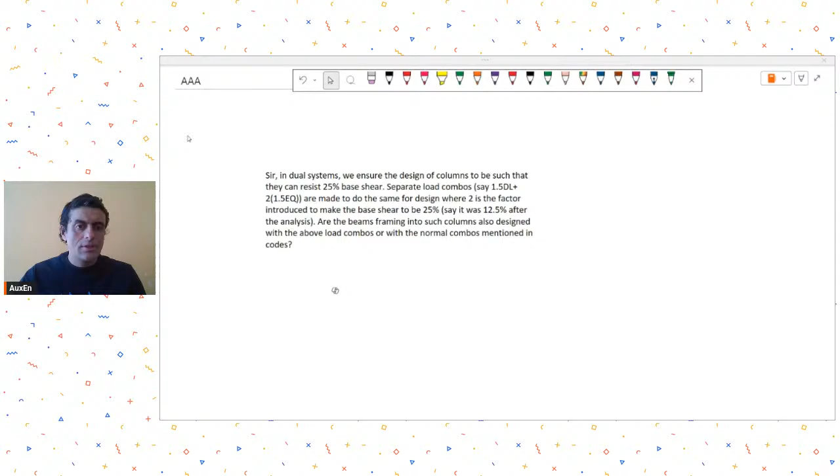The first question for this week has been asked by Engineer Manish Kumar Pandey. He's from Ranchi and he's a working professional. In the same context, another question has been asked by Engineer Kirti Gupta. She is from Noida and she is a working professional. I'll take both questions together because they are of similar nature.

The first question being asked is: in dual system clause, the base shear must be distributed 25% to columns and 75% to walls. If it is not fulfilling, how to take care of this clause?

What do you mean by not fulfilling? Have you found out how much percentage your walls are taking and how much percentage your columns are taking? It's not only base shear, it's the effects of EQ loads. So you need to first find that out.

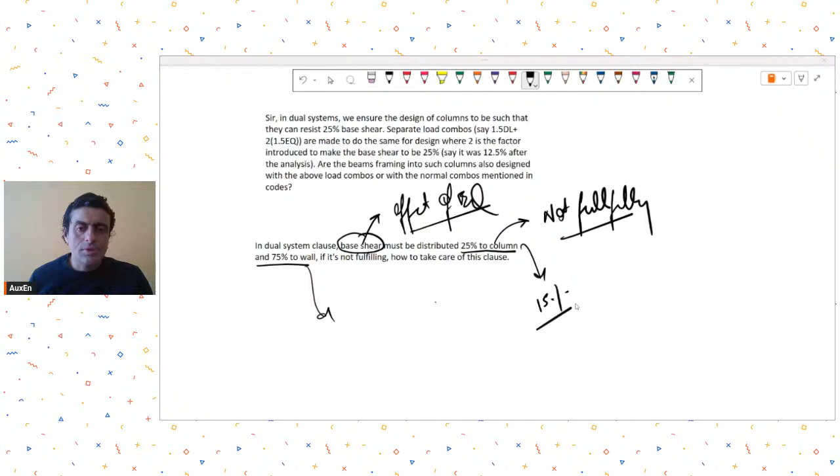Let's say your columns are taking lesser, maybe 15% of base shear. Then you need to increase the column sizes, make them stiffer so they start resisting greater shears. Or look at reducing the wall sizes, maybe they're too much, more than required. Also check the frame you've created, the lateral system, the beam system joining your columns to other elements. See whether modifications, like slightly increasing their sizes, will transfer some base shear to columns. Try these things and check whether it increases the percentage distributed to your columns.

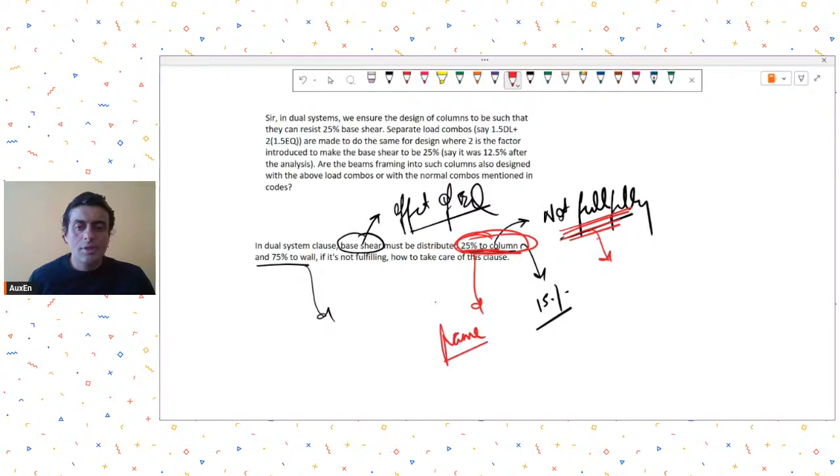So first, try to make your columns stiffer, larger columns, maybe add more columns. Second, try to reduce the size of your walls slightly from what was provided. Third, modify your beam system so more forces flow to the columns. Try these things and see what happens.

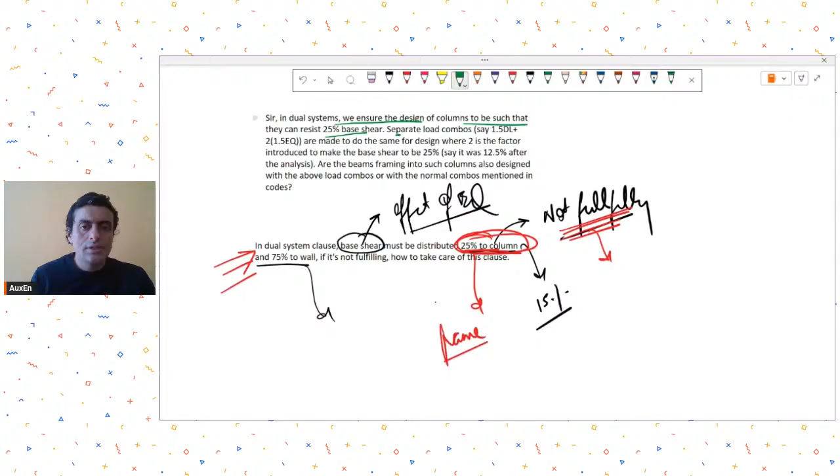In the same context, the next question was: in dual systems, we ensure the design of columns to be such that they resist 25% of base shear using separate load combinations. So you've made a jugaad type of load combination just to ensure that 25% of base shear is getting transferred to the columns, where 2 is the factor introduced to make the base shear.

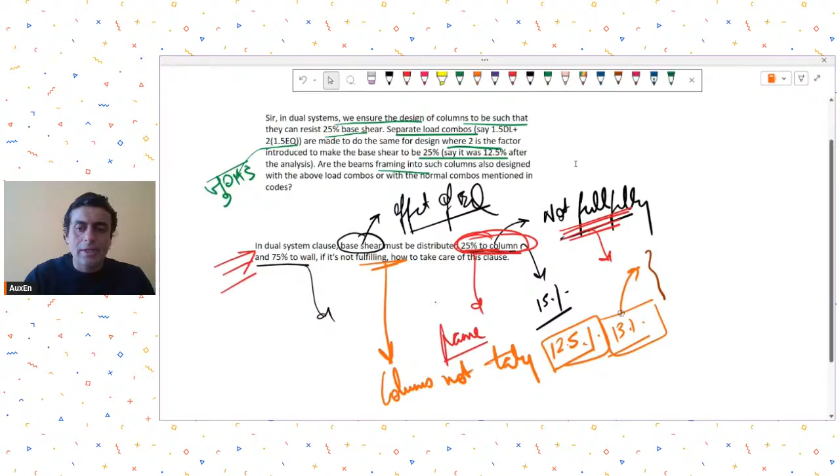To answer Kirti's question, one more point I'd like to add. Suppose your columns are not taking, they're only getting, as Mr. Manish says, 12.5 or 13% of the base shear, and you want to artificially increase them to ensure this 25% clause is met. My first reply was more about behavioral aspects, but here, if your columns are taking a lesser percentage than the designated 25%, here's another approach: let's say you applied EQ loads and for EQ loads they are taking 13% of your total base shear.

Now, with a small jugaad - for example, this was for your load combination 1.5 DL plus 1.5 EQ, and for this particular load combination it was taking 13%. Since you just wanted to ensure the codal clause, and you wanted 25% to be taken but it's taking 13%, take this ratio - let's say it comes to around 2 point something.

Okay, it will come to, let's say, 1.9 something. So now what you do is make a load combination, and you multiply the load combination factor artificially by this ratio. So now you have created a combination which you will use to ensure columns are designed for higher base shears. In this manner, practically you can try to satisfy the 25% limit.

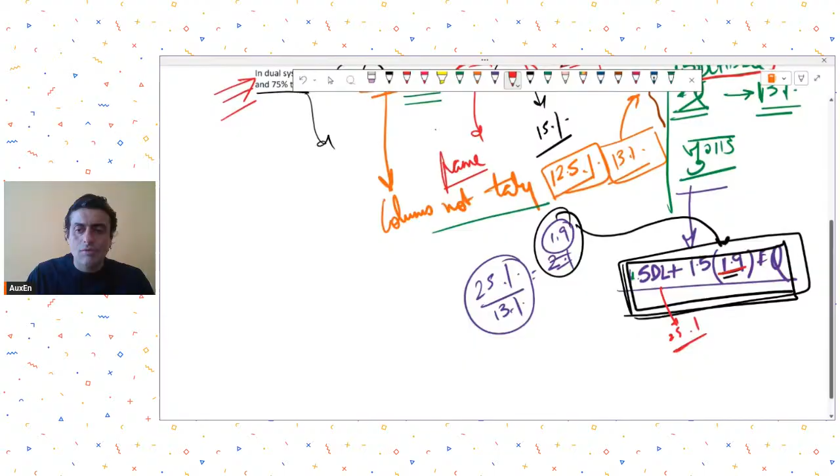But practically, if you just want to fulfill this 25% clause, you do it this way: whatever load combination you have made, you artificially multiply it by this multiplication factor, and then you see how much base shear is being taken by the columns. So for this load combination, you only design your columns, nothing else.

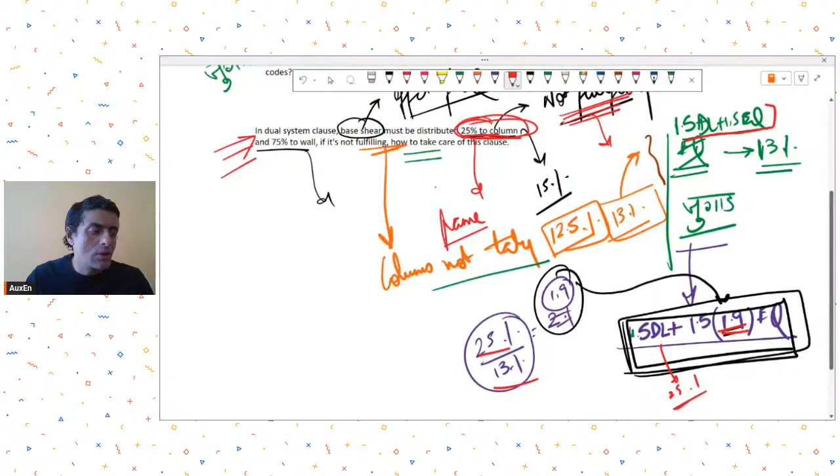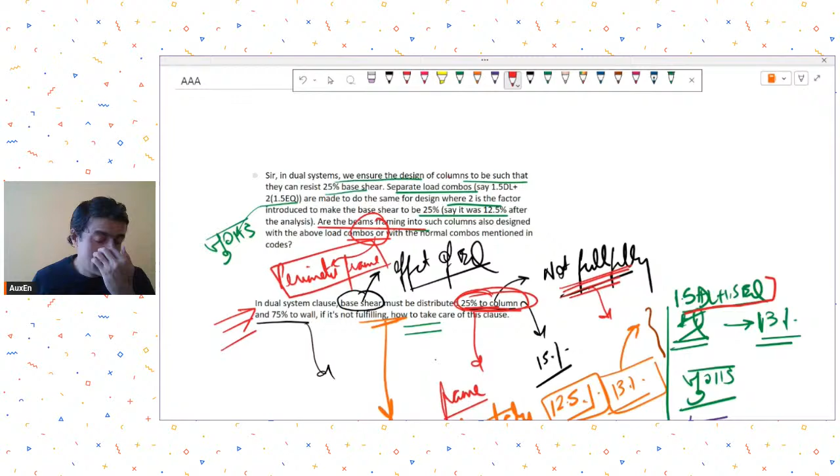Mr. Manish is asking, are the beams framing into such columns also to be designed with the above load combinations? Yeah, the code uses the term perimeter frame, so that includes the columns plus the beams. The part of your perimeter frame will include both beams and columns. So the entire perimeter frame should be designed for these artificially magnified load combinations.

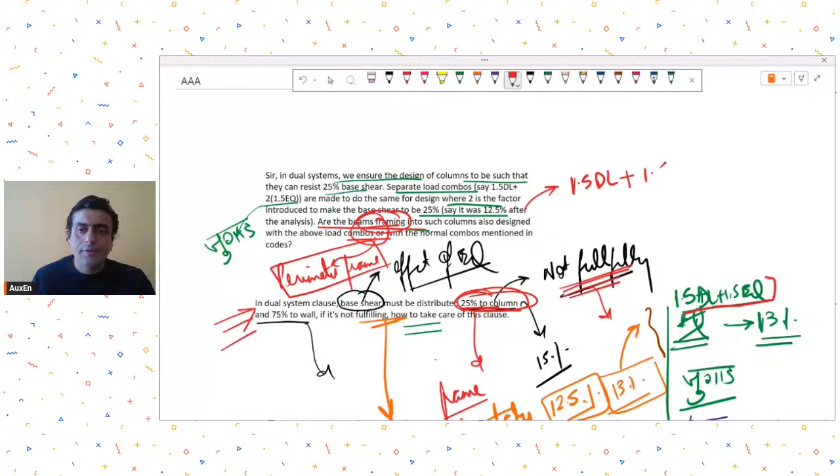Is this clear? So, for example, in your case, you had made this combination. You use this combination for designing your columns as well as the perimeter beams. So this was both the queries related to a similar topic.

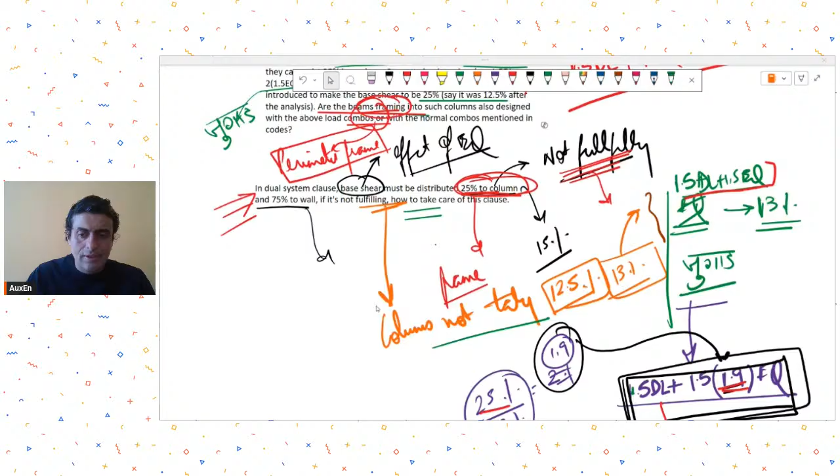Now we have a query from engineer Akash Babar. He is a working professional from Sangli, and he is asking, what are the design guidelines for grating and checkered plates?

I'm not aware of design guidelines, but basically you have to design them so that they are able to take the required loads. I'm sure there might be a specific IS code for it, however, I'm not aware of any such code right now.

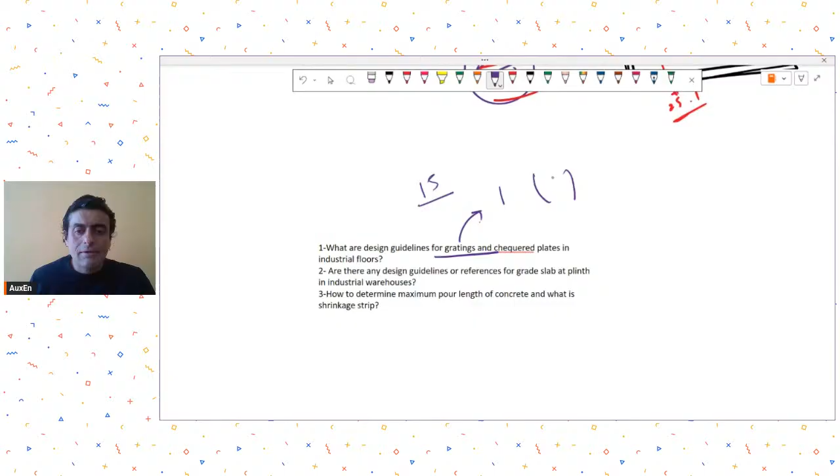Design-wise, whatever load you need to take on your checkered plate or grating, you design it as per the supports you have provided. Generally we treat checkered plates as two-way spanning slabs, so you may take the similar moment coefficients given in IS 456 for two-way slabs, and from there, on the basis of load to be resisted, you can find out the checkered plate thickness.

For grating, generally it's sort of a grid beam, because there are grids, there are flats provided like this, bidirectional flats, and for gratings generally you get from the manufacturer side a load sheet. By load sheet I mean they will tell you that for what span of your grating. Grating will generally be two-way spanning.

You can have checkered plate one-way spanning, but gratings usually are provided as two-way spanning, meaning you need support in both directions, all four sides. So for gratings, generally you may get load data sheets provided by the supplier or manufacturer, which tell you that for this span of grating, this is how much live load it can resist. So you may refer to those guidelines and load sheets given by the manufacturer.

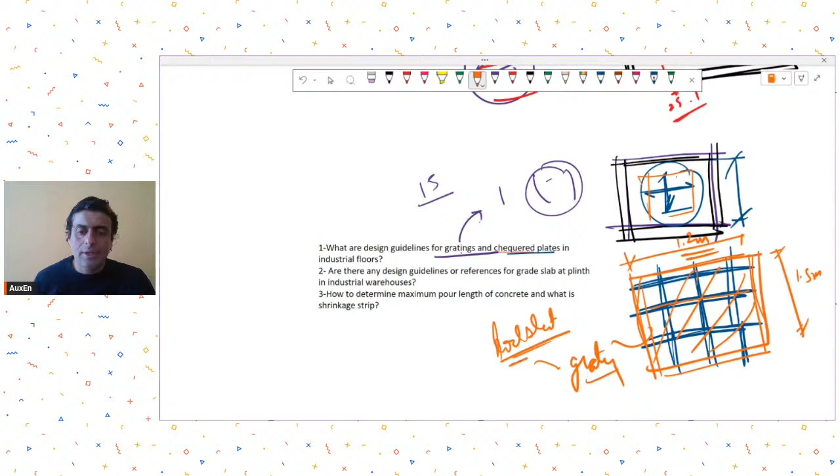Or if you want to do it on your own, you can make a quick model where you create these types of line elements, give them the size of the flat, and have all edges restrained on all four sides, and then see the moments you're getting in these individual flats, and find out the size requirement for the flats.

But are there any other specifications as per IS code? I am not sure, there might be some, but I also need to study. I don't know.

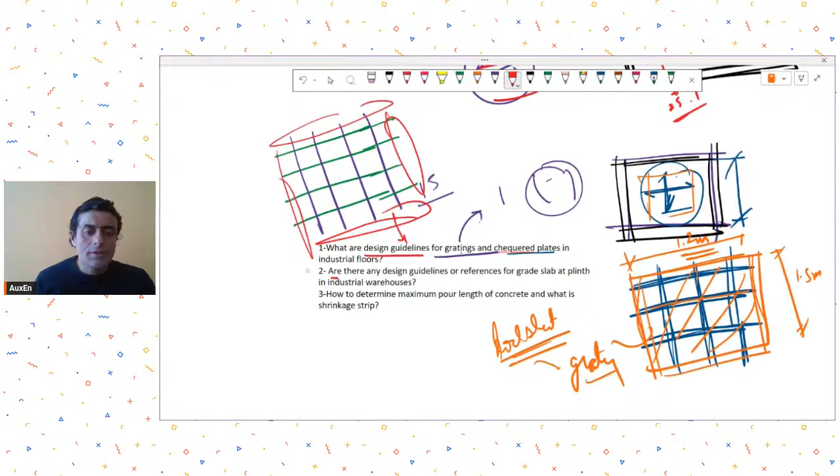His second question is, are there any design guidelines or references for grade slabs at plinths in industrial warehouses? Yeah, there are a couple of good guidelines available. One is a British document, and that British document is TR 34. One is this TR 34 document for industrial floors.

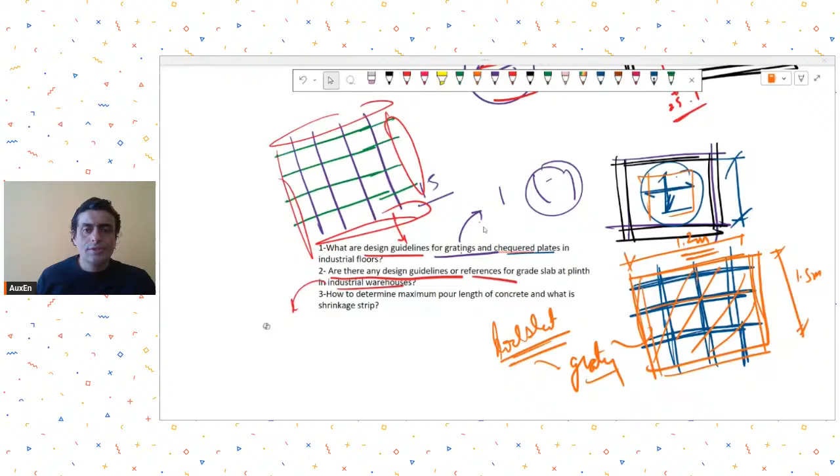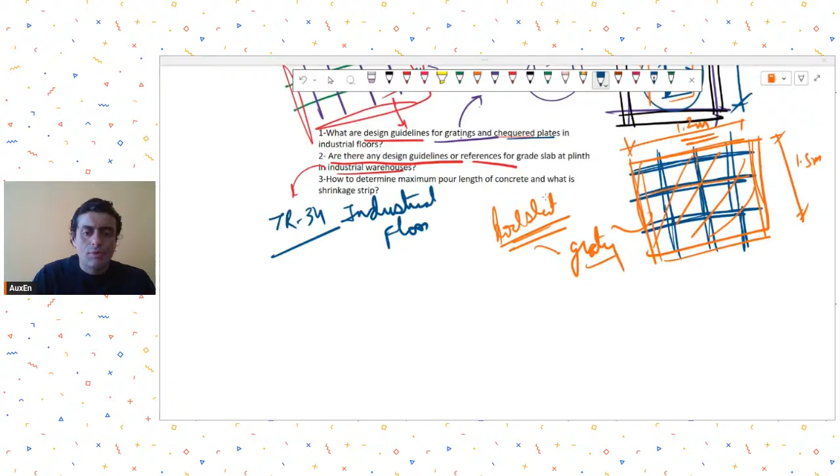It's a British document which you can refer, and it's quite detailed. TR stands for Technical Report number 34. This is a good document if you want to find more about industrial flooring and its design.

Then you also have another document, ACI 360. This is the American code, ACI 360 - not AISC, it's American Concrete Institute 360. This is another document for understanding the guidelines for industrial floors.

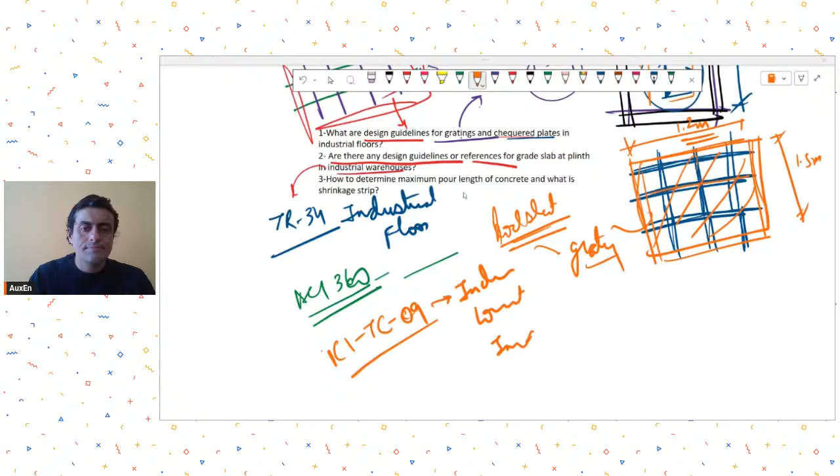You also have an Indian document published by the Indian Concrete Institute, called TC09. This takes most of the things from TR 34, and is also a good document if you want to study more about industrial floorings. The calculations are similar to what we do for rigid pavements based on Westergaard's equation, so those types of calculations remain the same. You might be interested in going through these documents.

Then the third part of his question was how to determine the maximum pour length of concrete and what is shrinkage strip. Shrinkage strip is basically when you want to leave a portion - so this is, let's say, casting concrete, and this is also concrete. This is showing you the plan view.

Suppose instead of doing a continuous casting, maybe to release the temperature effects or shrinkage effects, or because there were two dissimilar structural systems which you wanted to isolate from each other, separate from each other - suppose you wanted to do that, then we leave this part uncast, and cast it later. Such a strip or panel, such a portion which you are not casting together and are separately leaving empty to be cast later on, such an element is called a shrinkage strip.

Generally you see this in rafts, basements, where you have a podium area and a tower area, and you wanted to separate the podium area from the tower area - then we generally leave these shrinkage strips, which we cast later on.

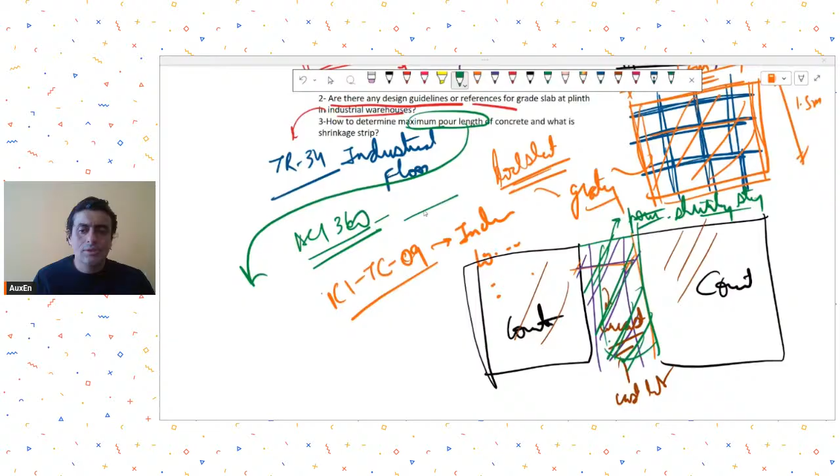How to determine the maximum pour length? Maximum pour length will depend on your capability, how much concrete you are able to cast in a single operation. Second, it will depend on the temperature effects, if applicable - beyond how much length temperature effects will become critical. So temperature effects or your ability to cast concrete in one single operation, or maximum pour length will also depend on the structural configuration.

As I just said, maybe if you wanted to separate the tower area from the podium area, you decide to only cast till this length and then leave a pour shrinkage strip, because there was a podium area which you did not want to cast. So that may also determine the pour length. Based on these aspects you may decide your pour length, and this is what is shrinkage strip.

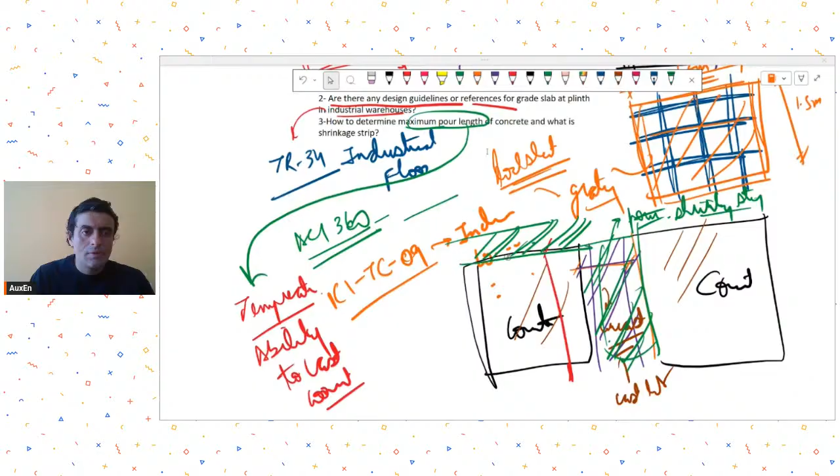So these were the queries by engineer Akash, and then we move on to engineer Shaktivel from Chennai. He is a working professional, and he is asking...

I am actually facing difficulty in connection design and how to interpret the STAAD results.

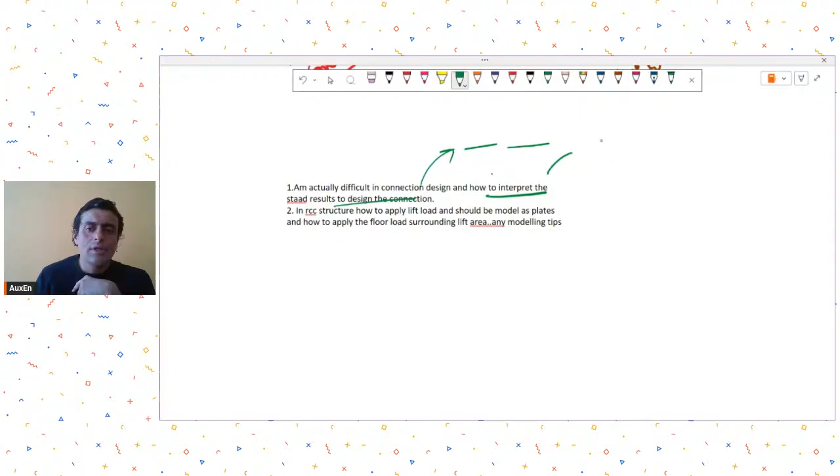What is the difficulty you are facing? You have to be more specific with your query. STAAD will give you the member end results, and then you note down these member results and use them for your connection design. So you have to be more specific with your query about what difficulty you are facing.

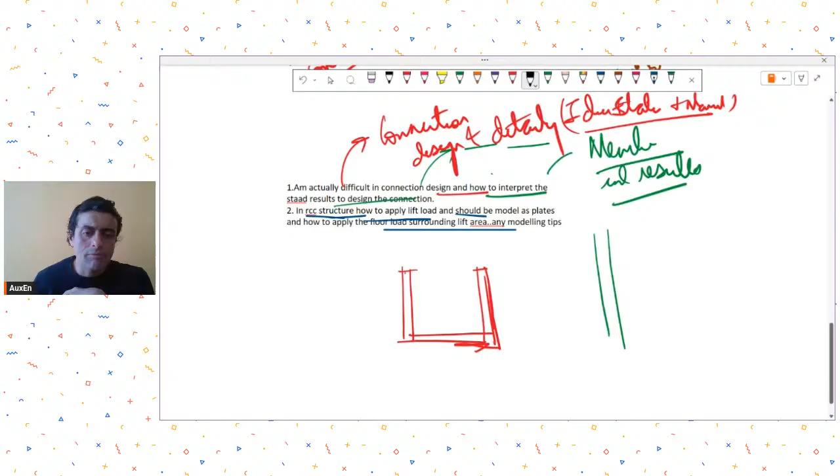Lift load generally is very negligible if you see. The major lift load is, so if this is the plan view of your RCC wall, let's say you have provided an RCC wall all around, your lift load generally is going to rest on the wall.

So what happens is they will have this type of arrangement in elevation. This is their lift, and then they will have a top slab. If it's a machine room lift, then there is a machine room above it. This machine room load is to be considered on this top slab wherever you place your machine room, and generally your lift goes till this level, the topmost floor level where the lift goes. Above that there will be a machine room.

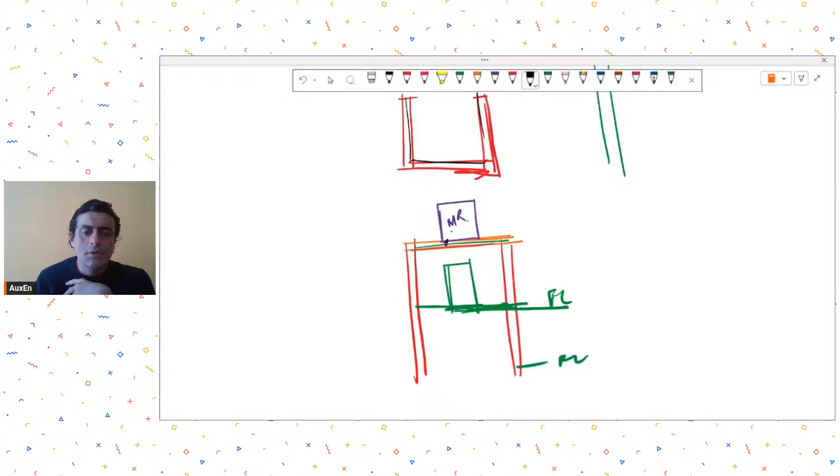Now that machine room will have some motor, so that motor load has to be considered, and it has a pulley system which helps your lift go up and come down. So you will have to consider the loads of this pulley. Those loads are generally given by the equipment supplier, so you have to account for this.

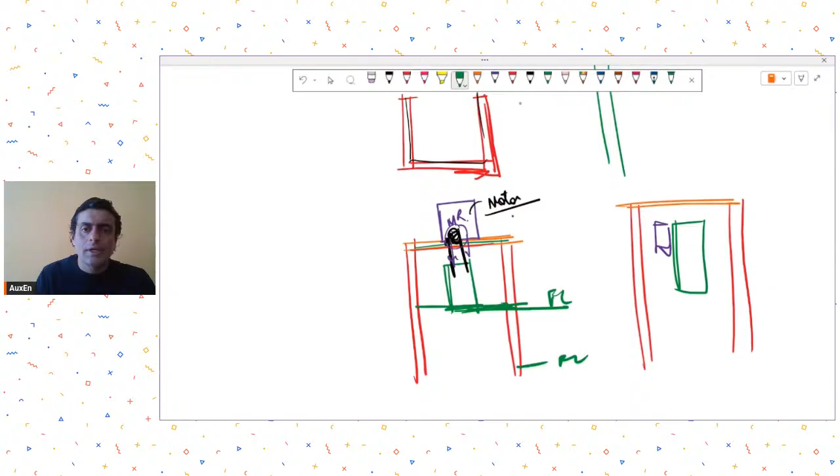In machine room-less lifts that you get these days, you will not have a separate machine room, but the motor is connected to the lift itself. So you will have your lift, and it has a motor connected to it, and then there is a pulley which does the lifting. In such cases, you just need to apply the load given for this pulley by the equipment supplier. So here you may provide some beam, and apply those loads on this particular beam.

Lift loads are not much. Even if you see a 1000 kg lift, that means only a 10 kilonewton load. A 1000 kg live load, say for 8 or 12 people, even if you consider 2 times impact load, that is only 2000 kg. If you add another 1000 kg for equipment, even though it's not that heavy, we are looking at 3000 kg, which is only 30 kilonewton, which is nothing. So lift loads are very nominal compared with the overall structural capacities that your elements have.

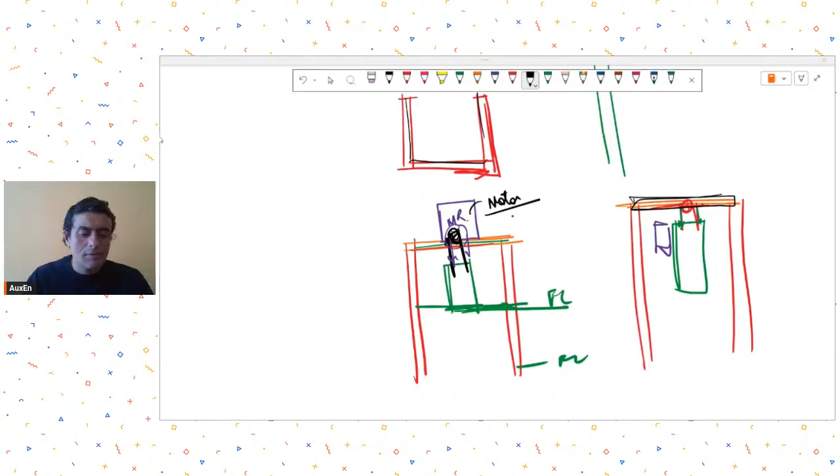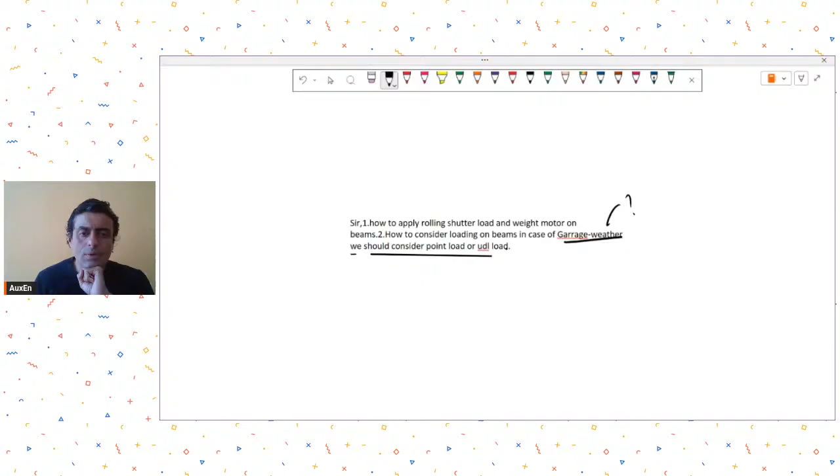He is asking how to apply rolling shutter load and weight motor on beams, how to consider loading on beams in case of garage weather. I don't know what garage weather means. We should consider point load or UDL load, and how to apply rolling shutter load.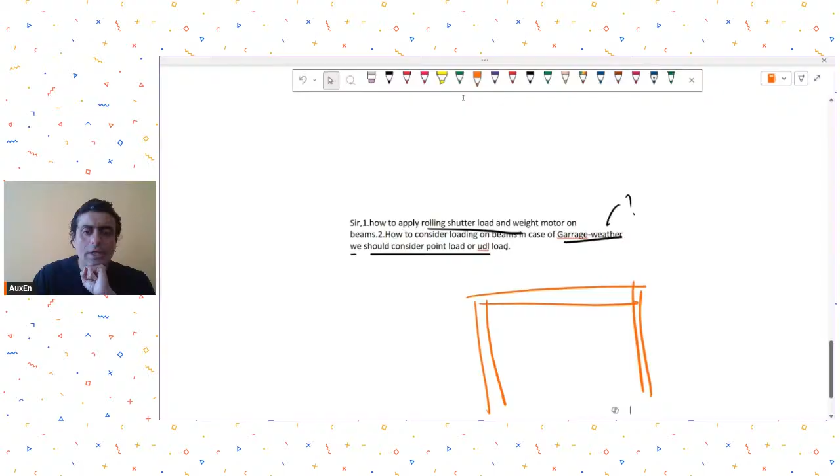Generally wherever you provide a rolling shutter, there is a frame that you provide, and from that frame there will be some motor element, and from that motor your rolling shutter operates. So generally that rolling shutter has rails fixed to this frame, but the motor is suspended usually from the top beam. You may have two motors, or you may have one central motor, whatever the design is.

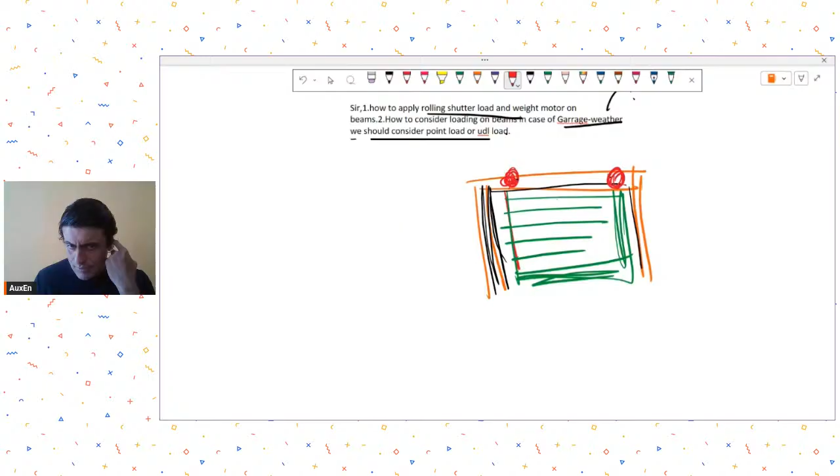Again, you need to ask your rolling shutter supplier what the loads are, and then apply those loads as point loads on these beams. The rolling shutter load is not much, so it's a very small amount of load compared with the overall structural capacities that your elements have.

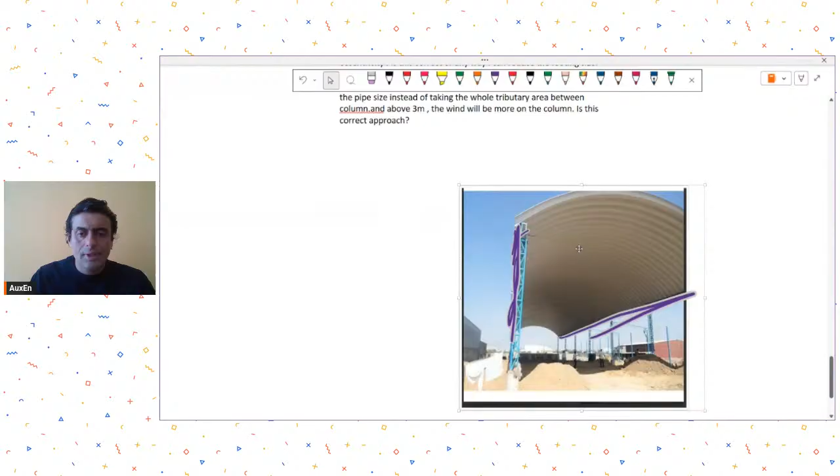So this is the image he shared last week, and in continuation to this is a follow-up he is putting. He is asking about the load application on a steel beam, for his Proflex sheet, a self-supporting roof resting on a steel beam. Instead of applying all the loads laterally, won't it be more appropriate to resolve the forces into two components?

Yes, of course you have to apply it as two components. Your Proflex sheet supplier will give you two reactions: one gravity direction component, and one lateral component. So you have to apply both, obviously.

Then his next query is also due to this lateral load on the column edge. Huge moment is getting generated at the steel and concrete column junction, resulting in more thickness of base plate. He has shared an Idea Statica image, let me check the email.

I'll just check the email if he has shared it on the email.

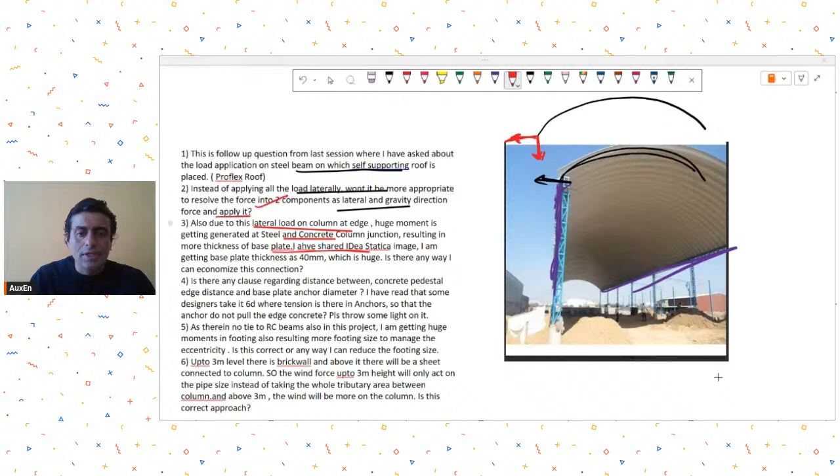So many people have this misconception that Proflex sheeting is cost efficient, but it's not. It does not come out to be cost efficient, because you may save on your rafter system, since the Proflex sheet itself is a self-supporting structure that takes the loads. But whatever you save in Proflex sheet, you put a lot of extra material into your columns, beams, and footings. So finally, if you see, it's not a saving that you get.

So this is his hollow section, and this is the connection that he has designed. He is saying that in this connection he is getting a base plate thickness of 40 mm, which is huge. Is there any way I can economize this connection?

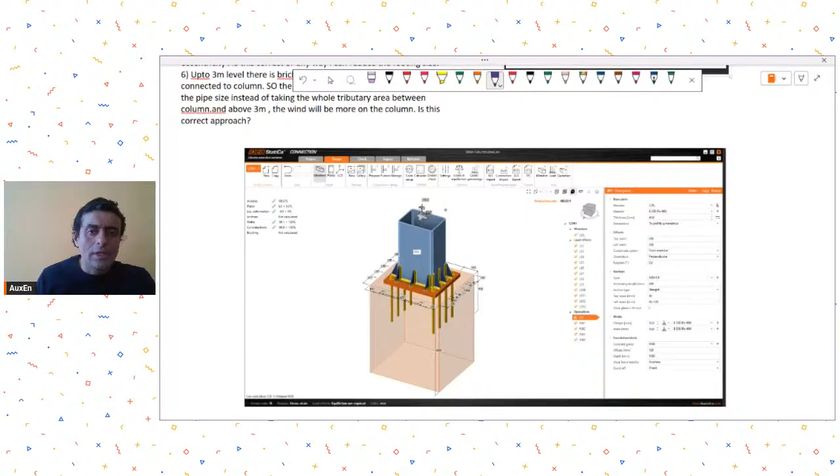Instead of putting it like this, what you do is provide gussets. So if I were to show you the plan view, let's say this is your column in green, a steel column, shown in hollow section, and brown is the base plate. My suggestion for a better structural system is that you introduce gussets like this, and then also gussets like this. Continue them like this with small pieces, and then also make stiffeners.

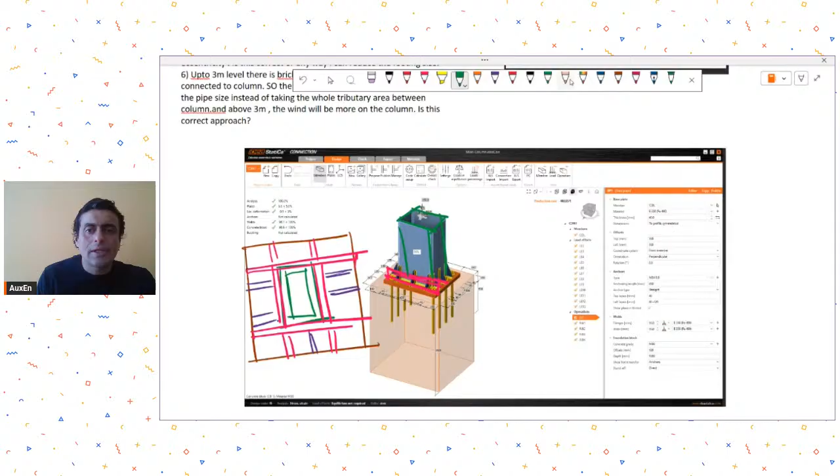Are you with me, Zoba? What I'm saying is you do this and then give a bolting arrangement like this. This will result in a much stiffer connection, and this will help you reduce the base plate thickness also. So instead of the connection type that you have given, try out a connection like this. In my opinion, it will be a better connection than what you have provided.

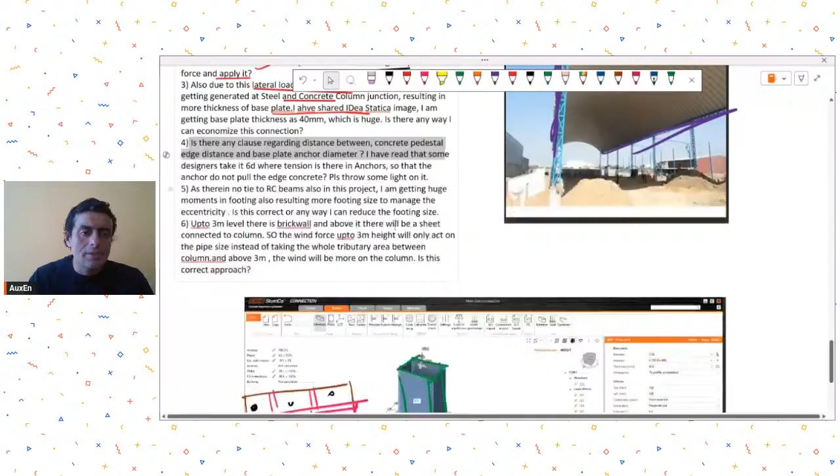Then his next query was: is there any clause regarding the distance between the concrete pedestal edge distance and base plate anchor diameter? I have read that some designers take it as 6D where tension is there in the anchors, so that the anchor does not pull out. Please throw some light on it.

You may try to refer to chapter 17 of ACI 318. They have given a detailed chapter on the anchors which connect your steel elements to concrete, and you will get a lot of good detailing rules that you can follow to avoid shear failures or bursting failures associated with these anchors. So read chapter 17 of ACI 318-25.

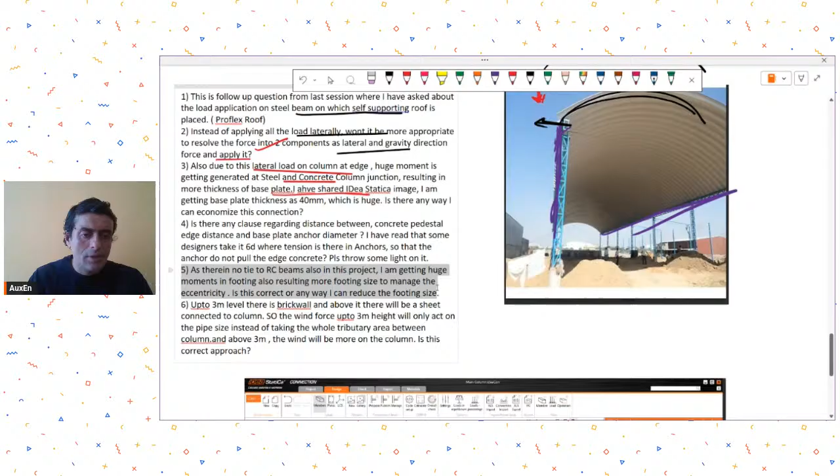His next query is: as there is no RCC beam, I am getting huge moments in the footing, also resulting in a larger footing size to manage the eccentricity. Is this correct, or is there any other way I can reduce the footing size? No, there's no other way.

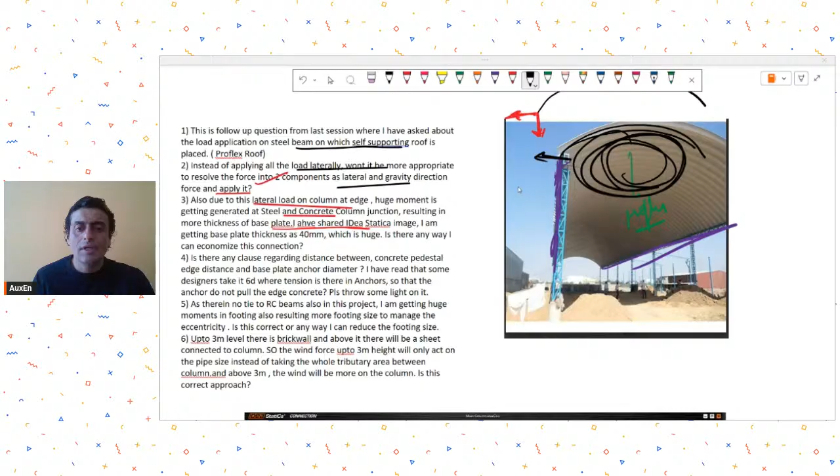As I told you, people have this misconception that Proflex sheeting is cheaper. It's not. This system will be almost as expensive as a truss system or a rafter system. Whatever you save, because the Proflex sheet suppliers will tell the client, see, you are saving on truss, you are saving on rafter, etc., but then a lot of money goes into designing these columns for huge moments, and you put a lot of money into footings which will be very large because of the large moments. So there is no easy solution - you'll get large sizes for your column and large sizes for your footing, because of the very configuration that you have provided. So no easy way out.

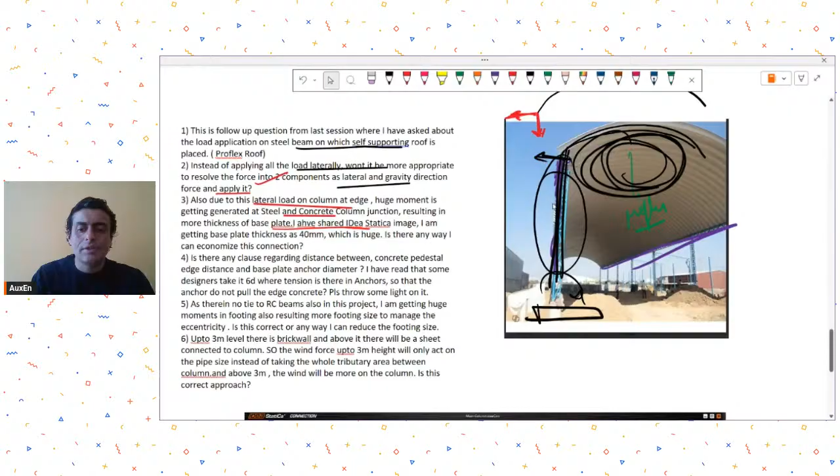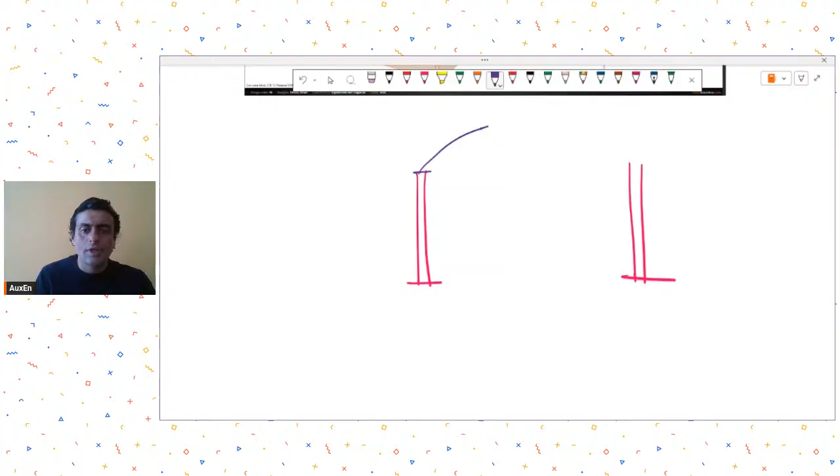One of the suggestions could be: let's say this is your column and this is your Proflex sheet, and this was your another column in elevation. Also remember that when your rise is very low, it leads to a lot of thrust. So if you could make a larger rise, your thrust should go down.

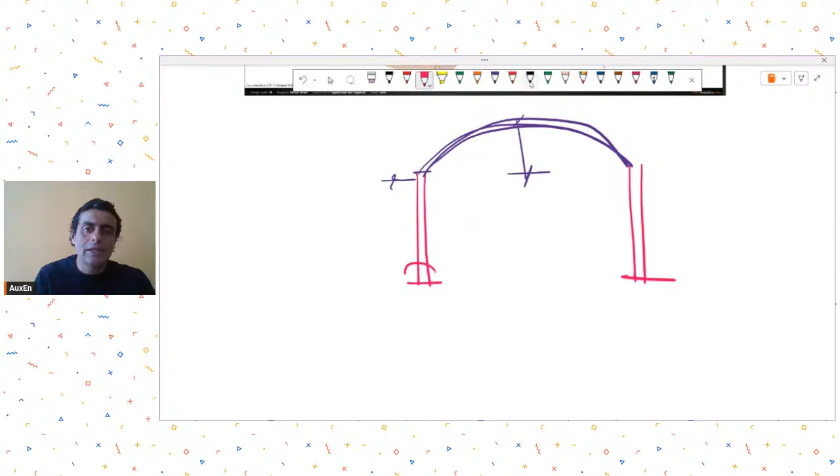Anyway, just a suggestion - if this was creating moments like this always, this was the permanent direction of the moments on your columns. If you were to provide a footing eccentric in this direction on purpose, it could help.

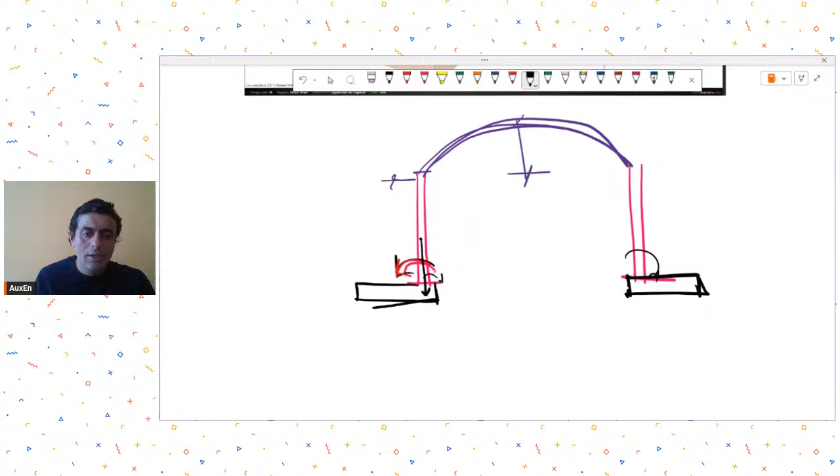Okay, so what I have done, I have deliberately provided an eccentric footing in this direction. What it will do is that you had a permanent moment acting on your footing. Now this you are trying to balance out with the axial load P and its eccentricity E. So let's say you had moment M. You are trying to deliberately add eccentricity to the footing in such a manner that it almost comes out to be equal magnitude wise, so that net moment on this footing reduces.

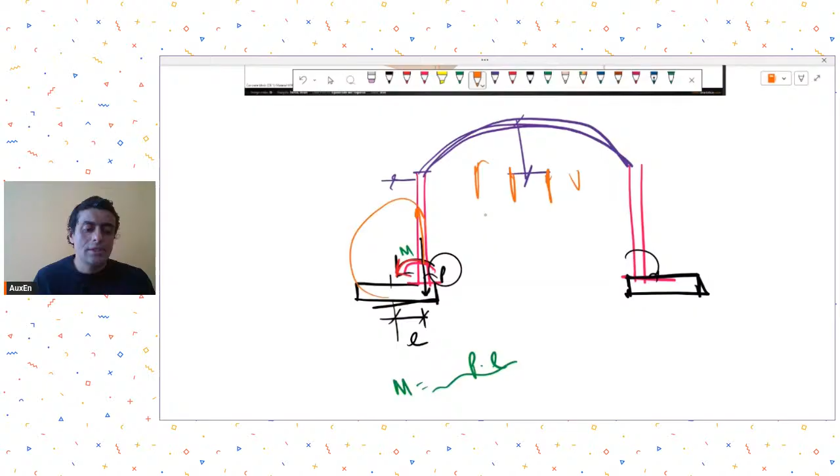But why will this not be very helpful? The reason is that your axial loads will be pretty low magnitude wise. So this system will also really not be very helpful. Another problem will be that if there is a net uplift in your column due to some wind action, then it will basically add to the entire eccentricity thing, so then this will not be workable.

So another strategy you could use would be, let's say, if I were to provide piles over here, because piles will take a good amount of tension, which will help you reduce the sizes. So see if you can provide piles, or see if you can provide some stub columns.

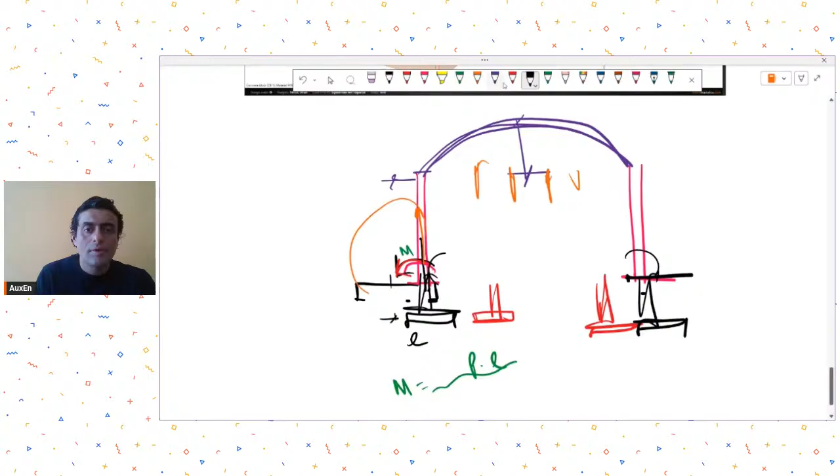So maybe you provide a footing, these are just some suggestions which you can think of. So you provide a footing like this, then provide another footing, a stub column footing, and try to connect these two elements together by a tie beam, a stiff tie beam, so that the moment can be taken by both these footings in terms of compression and tension. So you may try to think of such a system also.

So nothing much you can do with these profile sheeting things, because you are bound to get large footing sizes because of the large amount of moments that you would get.

You may do this, that if your brick wall is unconnected to your steel column, if your brick wall is independent of your steel column, you may not apply the wind loads for the first 3 meter height. So your argument could be that because the brick wall is unconnected to your steel column, you do not wish to apply the wind load up to the first 3 meters. That argument you can make, and that is a good argument, I would say.

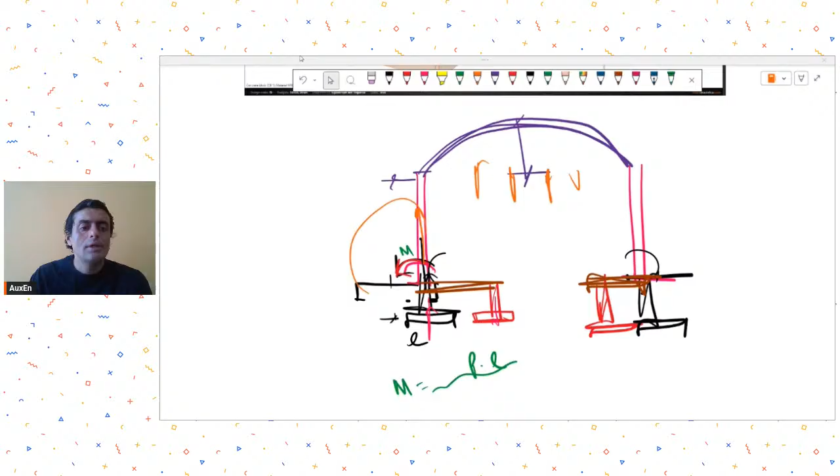All right, okay, so these were his queries. Then Mr. Ketan Mahajan has put another set of queries, so I'll just take them also.

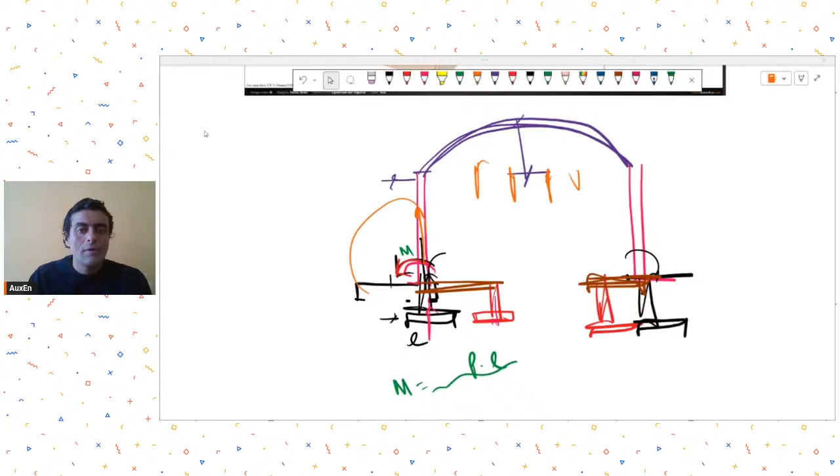His next question is, for structural audit purpose, is there any reference in IS code where age of building is stated, where if this particular building is this much year old, then it can be dismantled, etc. Only the CPWD manual states this, that for various types of buildings, the economic life shall be taken as below. No, I am not aware. There might be some IS code, but I am not aware of it. Maybe you need to search on the internet.

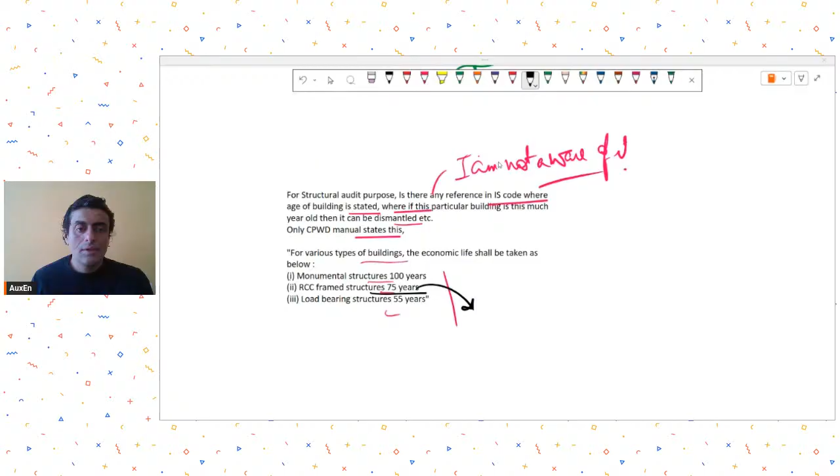But I have never seen in my life any RCC frame structure in good condition for more than 40-50 years. 75 years is a long time. I'm yet to see a good RCC frame structure having a life of more than 40-45 years. I don't know, I have never seen it. If you people have seen, just inform me. I'm yet to see.

Yeah, those RCC structures which are old, let's say those which were built in the 1950s, 60s, 1970s, they continue to perform well. But any structure made after, let's say, the 1980s or 1990s, I'm yet to see them in good condition. And looking at their condition, I don't think that they would survive for a 75 years life or even a 50 years life.

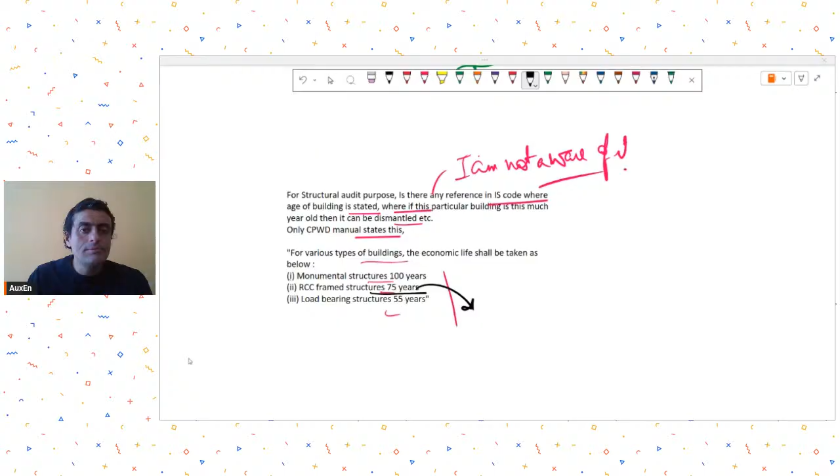So the first query is from Engineer Rishabh Thakare. He is asking, what if the column width and beam width is same? How is proper bar placement done, as column cover is 40 mm and beam cover is 25 mm, and beam and column are parallel to each other.

How beam reinforcement shall be carried in columns? Yeah, so this is a problem that is often faced.

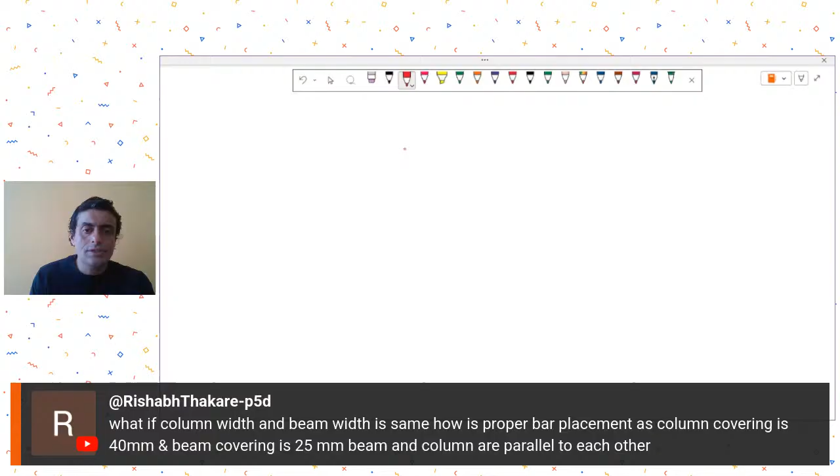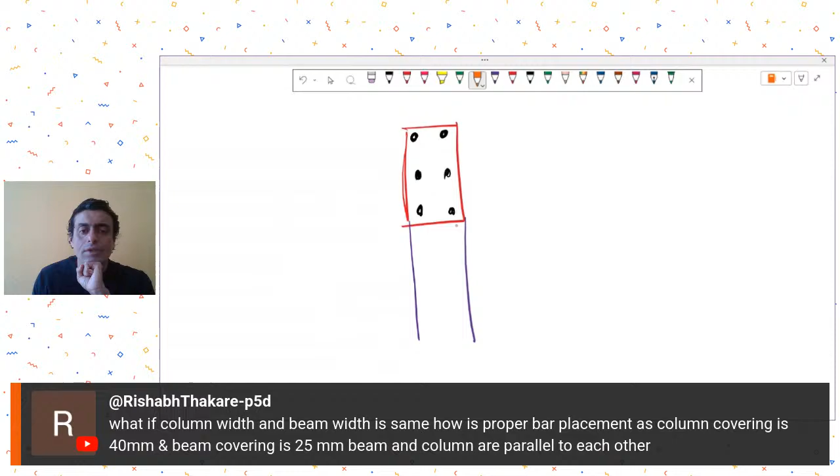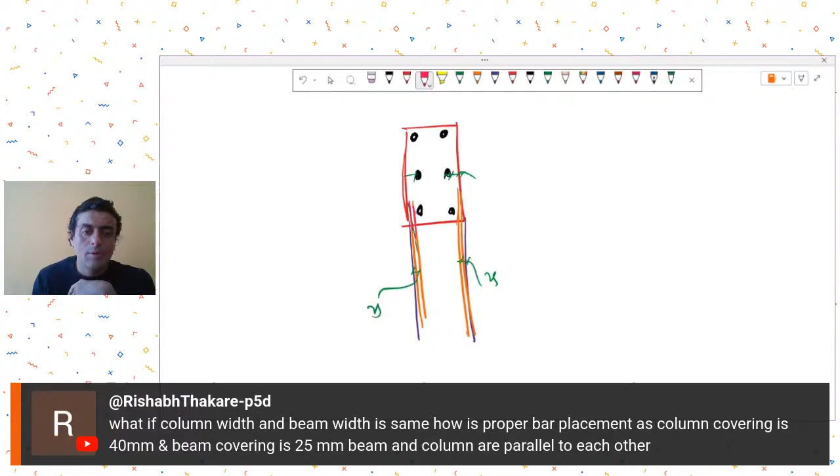Let's say in plan view, this is my column, and you had the same beam size, and your column reinforcement was like this with a 40 cover. So many times this problem happens on site, and it's not a very good practice. But what they do is that one of their beam bars lies outside the column bar, and they say that this is because this is 25, this is 25, and because this was 40, the column bar is at a larger distance than your beam bar. Therefore many do this incorrect, inappropriate detailing where their beam bars will be outside the column core, so to say. This is not good. So in such cases, you may be forced to increase the cover so that you are able to ensure that your beam bars are inside the column core.

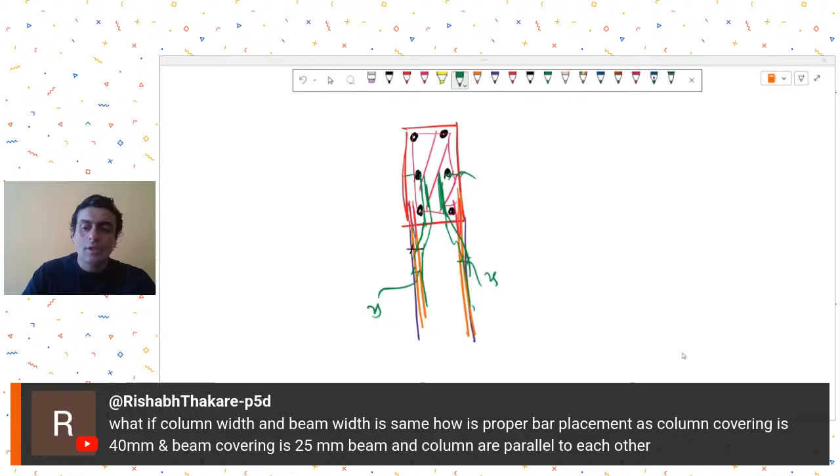Or sometimes people do this way also, that they will make a 1 in 6 slope, and in plan of course, and they will try to take their bars inside like this, inside the column core. But yes, this is a practical problem that is faced, and for this, the best solution is to have more side covers to your beam bars. There is no restriction on higher side covers. If it is higher than your minimum criteria, there is no problem with that.

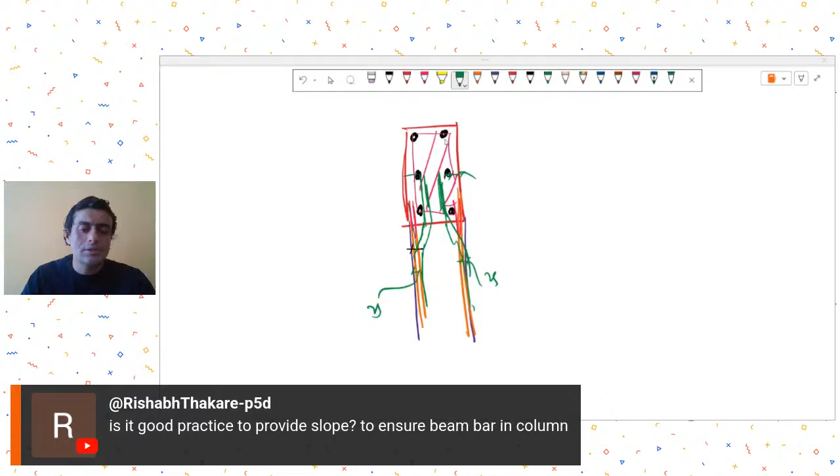Is it a good practice to provide slope to ensure beam bar in column? Yeah, I would say that. I don't see any problems with this. This slope is in the plan view, so yeah, I don't see any problem with this kind of detailing. If you see in retaining RCC structural walls, when we have boundary elements and when we have your web, generally we take the web transverse reinforcement inside the boundary element by providing such kind of a slope.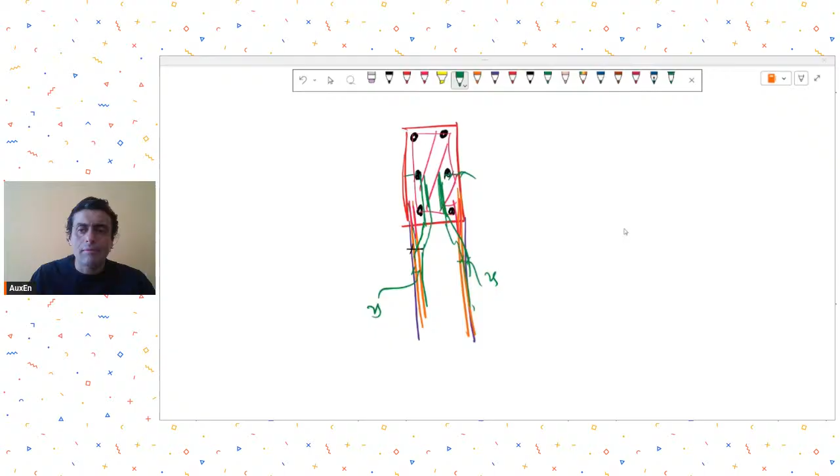Next query is from Sadashiva. In deep beams, how can we calculate the XU value, neutral axis value? What is the formula? So formulae for deep beams are sort of based on theoretical results or theoretical formulae.

So generally in deep beams, because of the in-plane shear deformations, your neutral axis, you may not be able to calculate it as per the general principles where we assume plane section remains plane. So in deep beams, plane section does not remain plane, and therefore you may not be able to use the analytical process in which we calculate the neutral axis depth. So therefore different codes give you some different approximate formulae to calculate the neutral axis depth. So you need to refer to such codes or such documents to calculate neutral axis depth in deep beams.

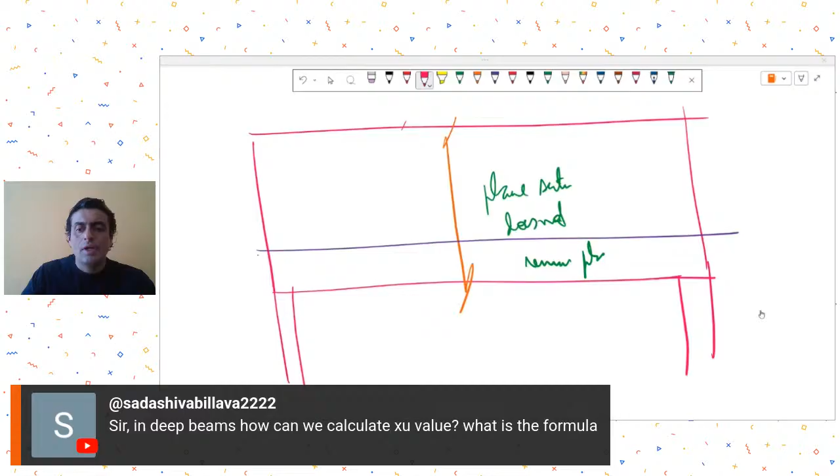So why are you not able to use your general analysis procedures for calculating neutral axis depth? Because the plane section remains plane assumption is not valid for deep beams.

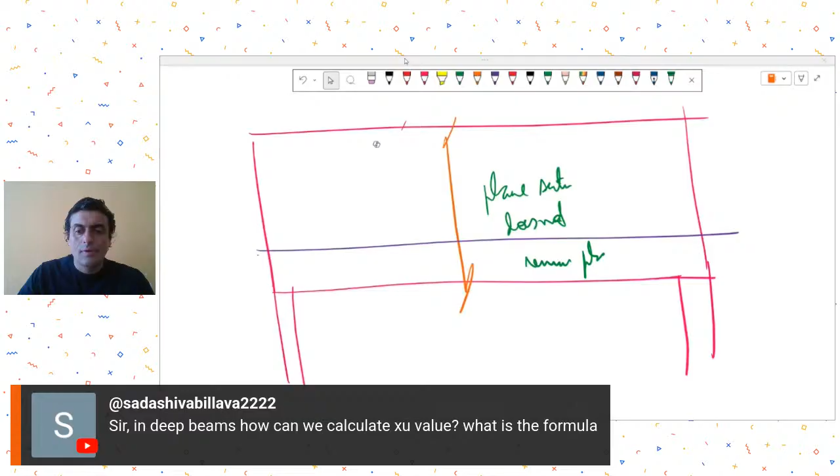He is asking procedure for casting deck slab when studs come welded on the beams. What do you mean by procedure? Procedure means when studs come welded on the beams. So you mean to say that because there will be studs that are welded on the beams, how will you place your deck slab? Is that your question?

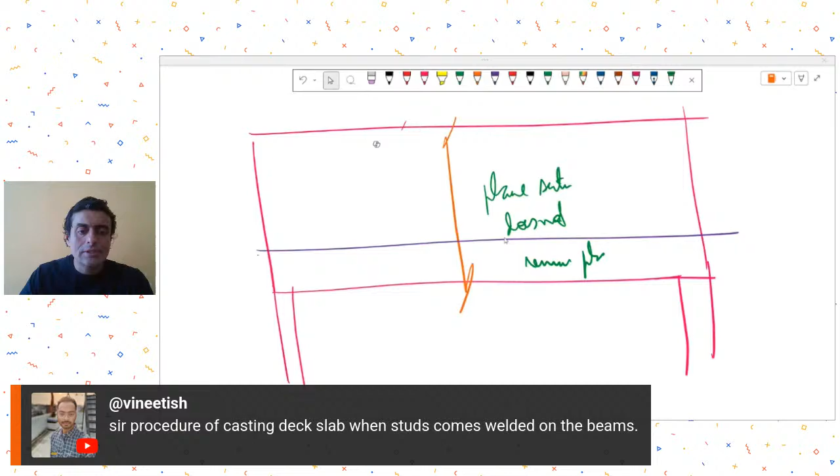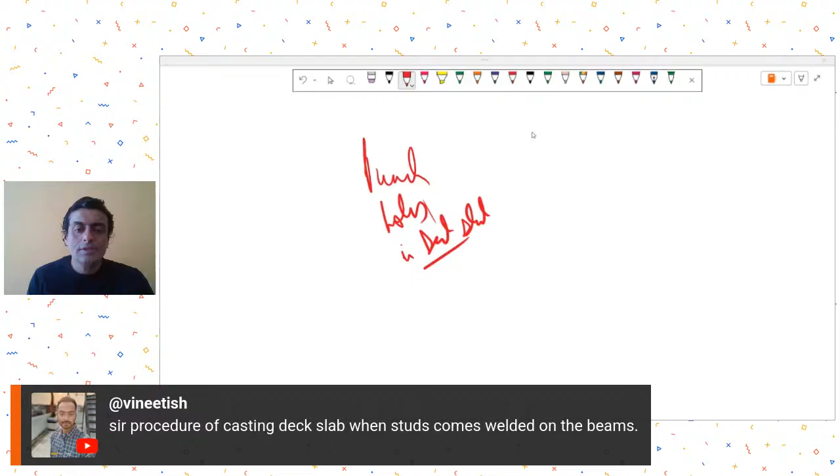So in such cases, you will have to make punch holes in your deck slab. You need to make punch holes in the deck slab, and then you need to insert that deck slab through your stud, and then the procedure remains the same. The other steps remain the same.

His next question is, Mr. Vineet, how to design walking columns? No, walking column means planted columns or shifted columns. So, what do you mean how to design?

The process of planted columns: you just do your analysis, find out the forces, provide the reinforcement. Walking columns generally mean planted columns or shifted columns in plan view. Okay. Yes. Is that okay?

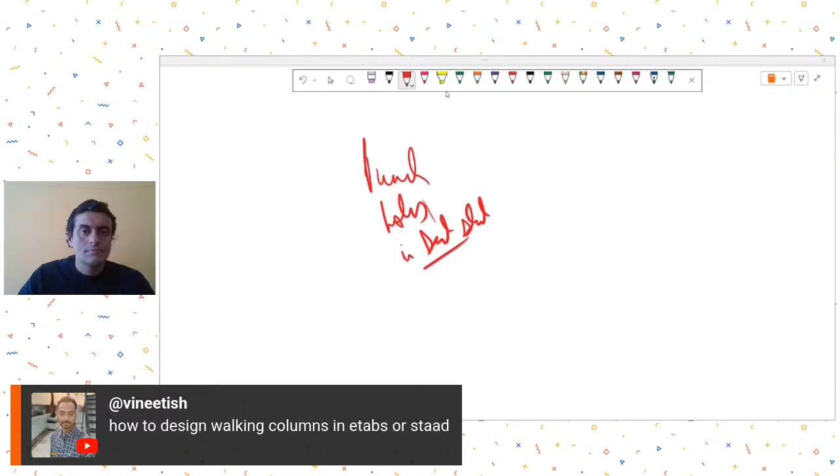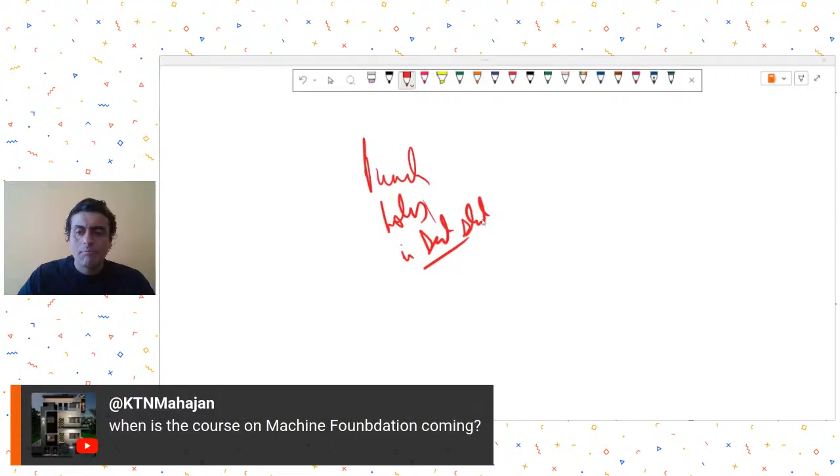Mr. Ketan Mahajan is asking when the course on machine foundation is coming. Maybe we'll try to do it in the near future, I don't know as of now. Currently we are doing the RCC design course using American codes, that is ACI 318 and ASCE 7-22.

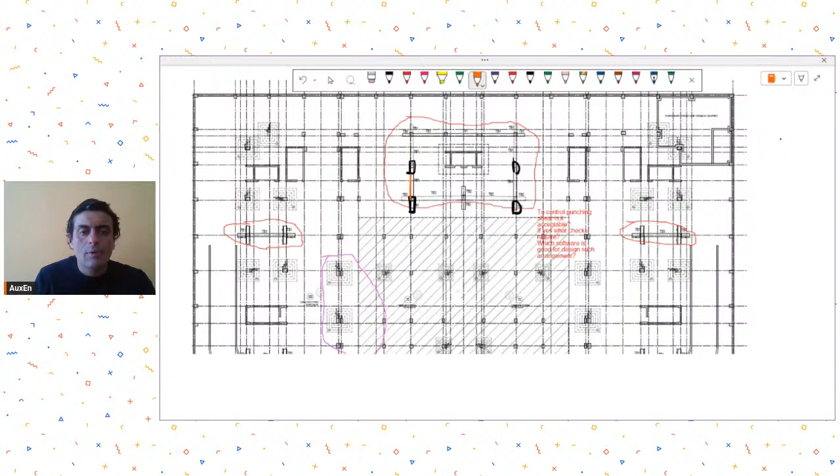So he has shared this drawing, and his question is about controlling punching shear, two-way shear - is this system acceptable? What they have done, I think this is a raft since he hasn't mentioned it clearly, but I'm assuming it's a raft. These are the columns, and all the individual columns have this kind of tie beam provided. So this seems to be a tie beam integrated with the raft itself.

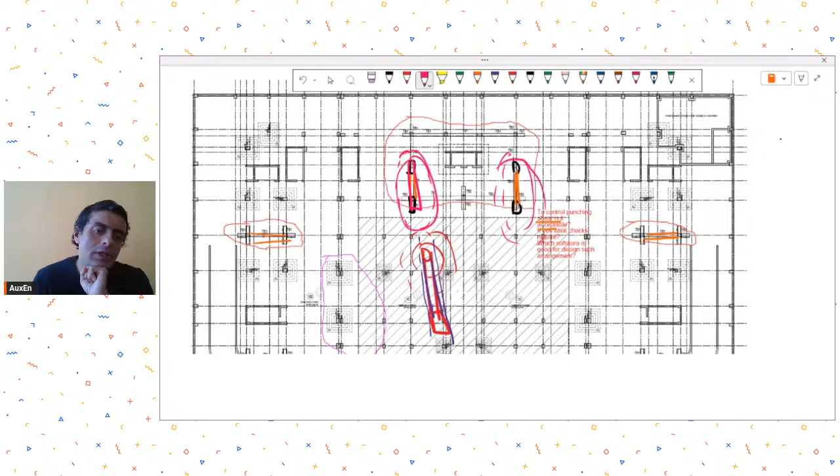So to control punching, is it acceptable? What has basically been done is, if your column had a two-way shear, you have deliberately tried to make it a one-way shear case by adding a very stiff element. But then the problem with this system is that the entire thing may punch. It's quite possible this may have a two-way punching effect because they've just made two columns and tried to connect them with this tie beam. So it is possible to control punching through this arrangement, but you need to also check.

What you can do is, on this perimeter, try to make a perimeter d by 2, and add up the column loads to see how much will be the approximate punching shear on this perimeter. Check whether this perimeter will satisfy for your raft depth, whether it satisfies the punching or not. So this check you may have to do on your own, or you may be interested in finding out the stresses around this column.

So you can go to Safe. Which software is good for this arrangement? Use Safe, Safe is a good software. In Safe, you can check the shear stresses around this perimeter and see if it is less than the permissible VC or not.

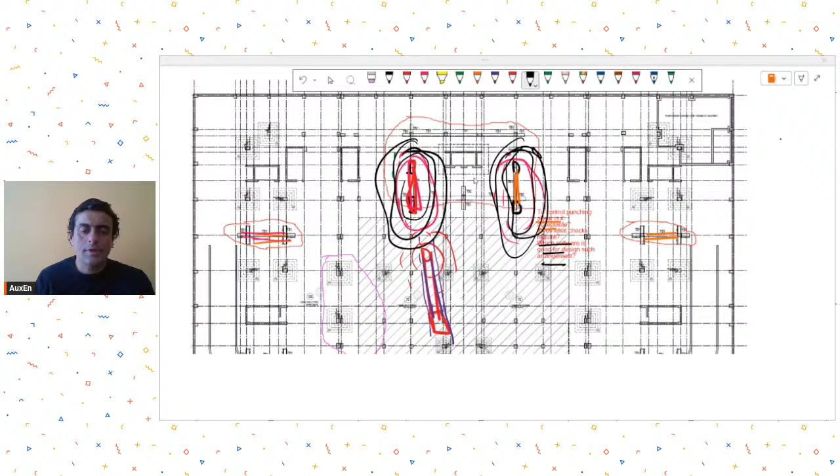Mr. Rishabh Thakre is asking what to do if a structure is seen with settlement cracks and vertical cracks on beams. First try to ascertain the cause for the cracks. If it is due to settlement, I would suggest letting the structure settle and then try to repair it. These days you get stretchable epoxy-based, or rubber-based fillings which will stretch with the crack width if it increases. So those types of repairing techniques you may want to use. It depends on where you are getting cracks and what is the nature of the cracks, so you come up with a repair strategy.